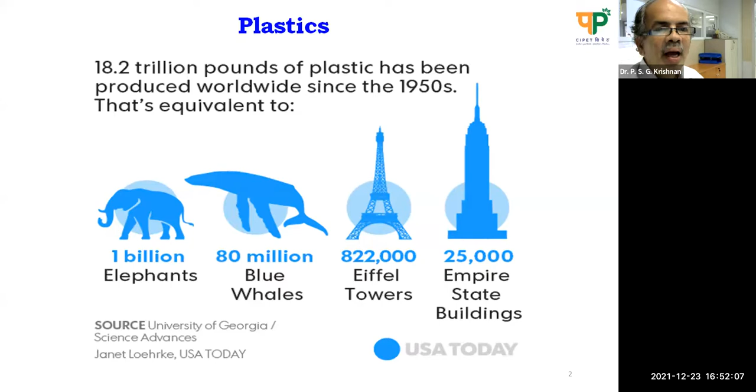And if you see the PET, it is lightweight in nature and it reduces emissions. That's why it has replaced the bottles as well as the metal containers. It gives a low carbon footprint, it uses less water in production, and it costs 50% less when compared to the other alternatives. India has one of the highest PET recycling rates globally: 90% of PET bottles produced so far are recycled.

PET is safe. Unlike polycarbonate, there are no BPA issues, bisphenol A issues, and it is free from heavy metals. Over 70 lakh people are directly or indirectly associated with the PET industry, and they are also supporting the circular economy. More than 100 crore garments and home textiles are made from recycled PET bottles.

Earlier, I was working in Futura Polyesters. At that time, they used to collect the waste PET bottles and do chemical recycling. Then that chemically recycled PET was exported to the USA, to Pepsi, for making PET bottles again.

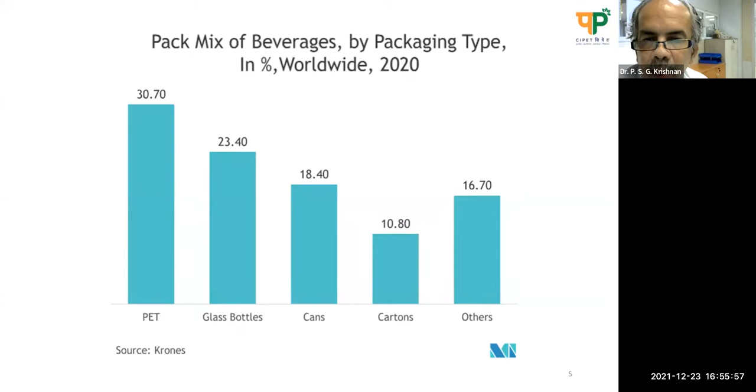Let us see the per capita usage. North America has 15 kgs as far as PET is concerned, and we are on the lower side, hardly 150 grams. We have low per capita usage because we always take fresh fruits as well as freshly brewed coffee. Also, we prefer to take water in bigger cans rather than in water bottles. That is why we are on the lower side. In the global market, the highest growth rate is expected in the African continent as well as the Asian continent and Australia.

And there will be a medium level in the case of both North and South America. And in the case of Western Europe, it will be on the lower side. And then the IMARC Group expects the market will reach 15.2 million tons by 2026, compared to 13.1 million tons in 2020. So such a huge growth rate is possible, and it has very good future prospects.

And if you see, the average life expectancy today is 69 years, whereas a bottle can remain as such for 450 years. Therefore, if you leave the bottle, it creates a lot of problems for the environment. Therefore, it should be properly recycled instead of leaving it to the landfills. This is the time frame for different materials, and the bottle takes 450 years.

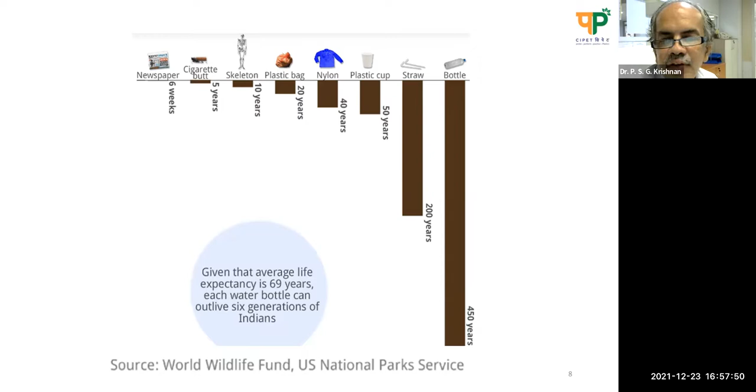And if you see, in India, among the most common types of plastic consumed, the first is polyethylene, followed by polypropylene, then comes PVC, and PET at 1,275 kilotons. This is a report given by the Plastindia Foundation. This is the Indian scenario as far as PET consumption per year.

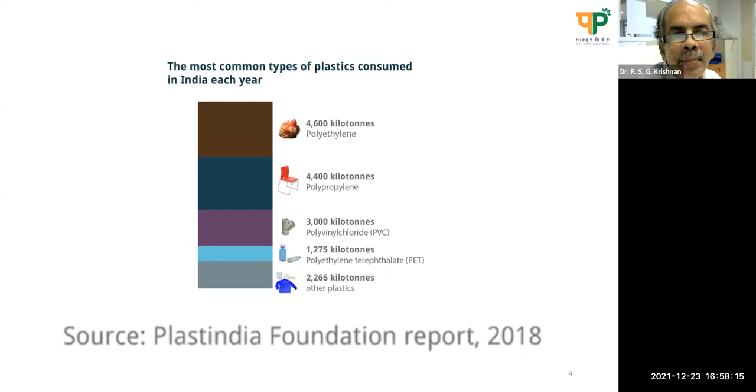And if you see, PET bottles are among the plastic items found along the Indian coastline. This was the report given by Beach and Beyond. Around 6,511 plastic bottles are lying along the coastline. Therefore, even though we think that 90% is a very good amount and we are above the average of PET recycling, still that 10% either remains in the landfills or on the roadsides and remains unutilized. Therefore, we should make use of that by recycling it and make it 100%.

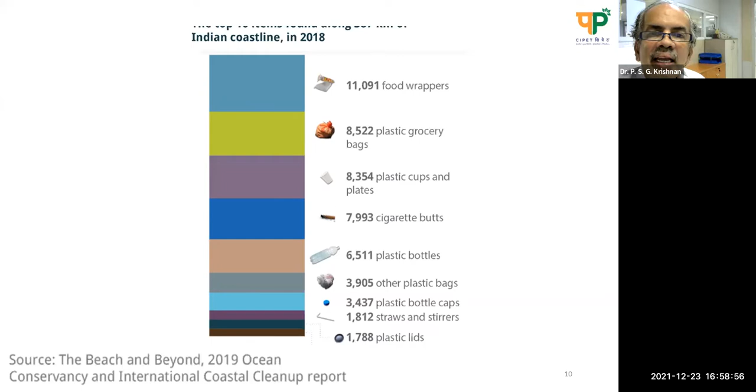Therefore, if you see, the waste generated by 2050 will touch 25,000 million metric tons. And waste recycling will hardly be 8 billion metric tons, or 8,000 million metric tons. Therefore, there is still a big gap between the waste generated and what is recycled. By 2050, roughly 12 billion tons of plastic waste will end up in landfills, and that creates a lot of harm to the natural environment. Therefore, we should always encourage recycling so that you can minimize the plastic waste instead of it going to the landfill.

And if you see, the overall plastic waste recycled is around 60%, PET recycling is 90%, whereas the world average is only 22%. We are on the better side, but there is still a long way to go. And we search for solutions because a huge amount of waste is lying around, and this is not a new scenario. You might have seen such scenarios in many parts of our country. And what do you mean by recycling? Recycling saves energy, preserves natural resources, reduces greenhouse gas emissions, and keeps toxins from leaking out of the landfills. That is why we recycle.

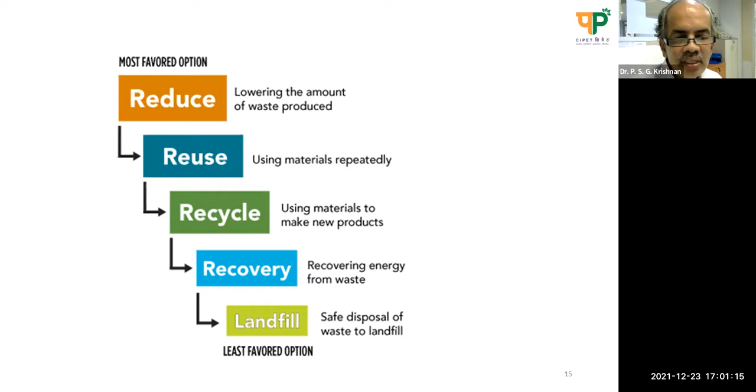And if you see, in the 1980s there was no recycling concept and everything was going to the landfill. They used to dump it as landfill. So what happened in New York? There was a land scarcity. Therefore, since there was land scarcity in New York, they immediately took all 3,000 tons of plastic waste, put it on the Mobro garbage barge, and tried to send it to a neighboring state. The ship traveled here and there for 155 days looking for a place to dump these 3,000 tons. First, it was sent to North Carolina.

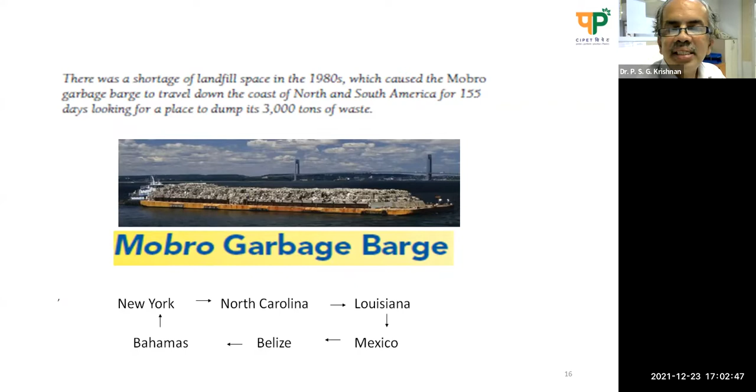Only then did the concept of recycling come. Till then, it was just going to landfill only. Thank goodness that they refused to allow it in. Otherwise, we would still be confined to landfill only. Afterwards, the recycling concept came into existence. And if you see, today we are giving different numbers.

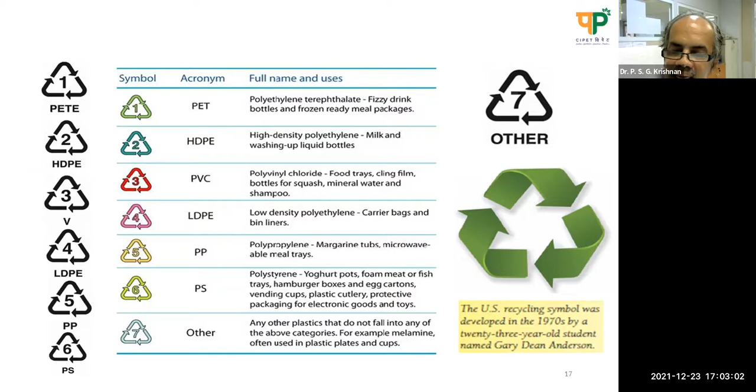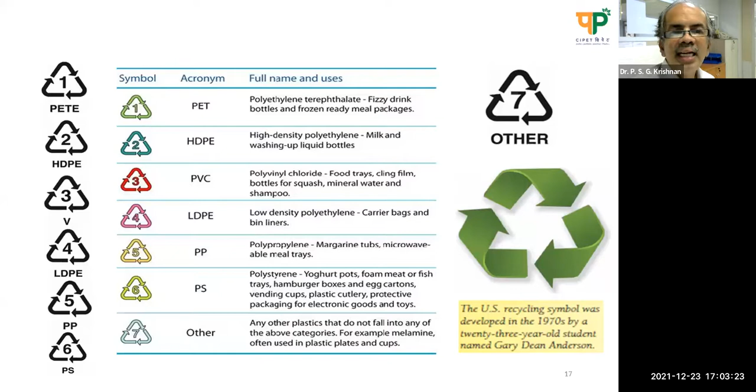This is the recycling symbol, and this was developed by a student. He's a very young chap, 23 years. Gary Anderson created this recycling symbol in the 70s, and that is being used today. And different numbers are given. PET is given 1, HDPE 2, PVC 3, like that, and none of these 6 is given as 7. If you see any recycling symbol with a number, that tells what kind of polymer it is.

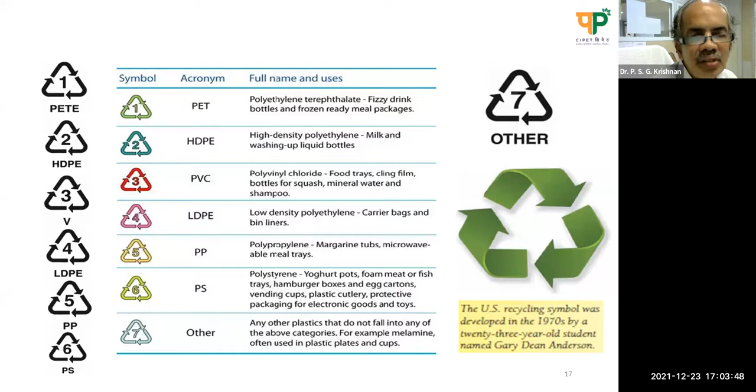Luckily, throughout the world, the same number is used. Whether a bottle having a number 1 is from India or from Australia or from America, it means it's only PET. There is no confusion. Everybody is luckily following the same number, so that any layman, if he takes it, by seeing the number will be able to easily sort it out. That is why this number came.

And if you see the classifications of recycling, there are 4 types. Primary recycling is nothing but the recycling that you do on the shop floor. When a material is not meeting the specifications and gets rejected, they do the recycling. It is straightforward recycling. There is no confusion, no need to do any segregation and no need for any cleaning. This is straightforward and is being used in all the industries. If any material gets rejected, typically they use around 10% and consume it.

Secondary recycling is the one which comes after it reaches the customer. Secondary recycling generally will be mechanical recycling. Here a lot of things you have to do. You have to do the cleaning and then segregation, and then you go for the mechanical recycling. Tertiary recycling is chemical recycling. In today's talk, I will be talking about mechanical as well as chemical.

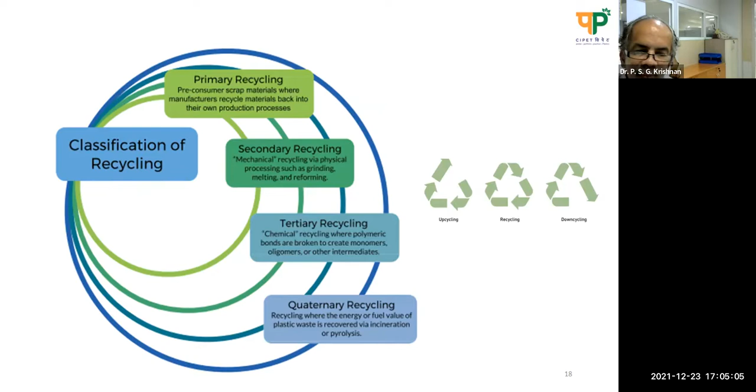The fourth one is quaternary recycling, where you get the energy or fuel value of the plastic waste, either by incineration or pyrolysis. As far as PET is concerned, quaternary recycling is not the right option. This is what I was telling, that the granules are produced and then you make different kinds of plastic articles. Then if it gets rejected, not meeting the specifications, you try to consume it rather than throwing it out. That is known as primary recycling.

If it goes to the consumer, then afterwards, if it goes to waste, either you can go for mechanical secondary recycling or go for tertiary recycling, make a monomer, and this monomer you can again polymerize. Otherwise, if all these things are not possible, then you send it for quaternary recycling.

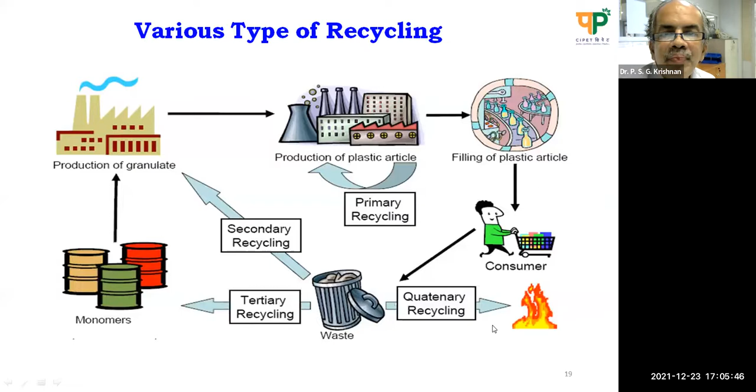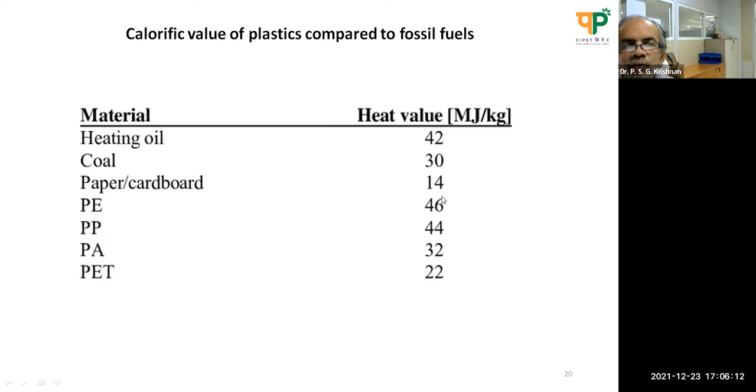As far as PET is concerned, the calorific value of PET is very much on the lower side. It is 22 only, whereas coal is 30 and heating oil is 42. That is why PET is not the right material for quaternary recycling, because it's half of heating oil or coal. Whereas polyolefins, PE and PP, are 46 and 44; that is why polyolefins are the most suitable for replacing coal or heating oil, whereas PET is not suitable. Therefore, I will be confining to secondary and tertiary, especially mechanical as well as chemical recycling.

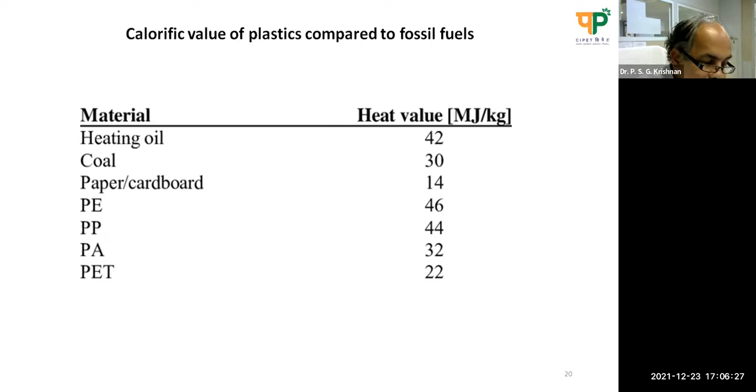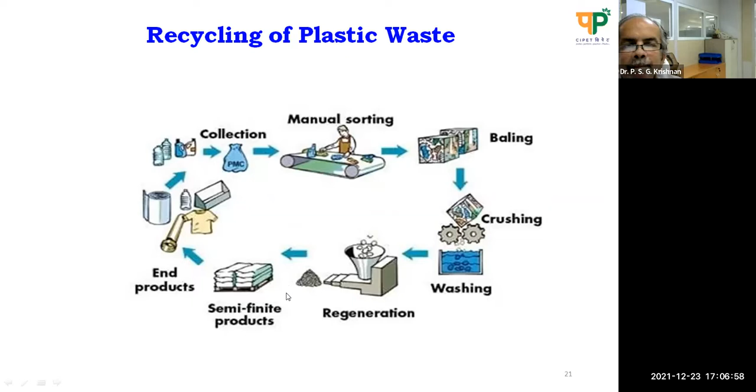And then a lot of separators are used, because sometimes you may have some metal contaminations. In that case, you have to go for magnetic separators, and sometimes you may have non-ferrous contaminations. In that case, they use an eddy current separator.

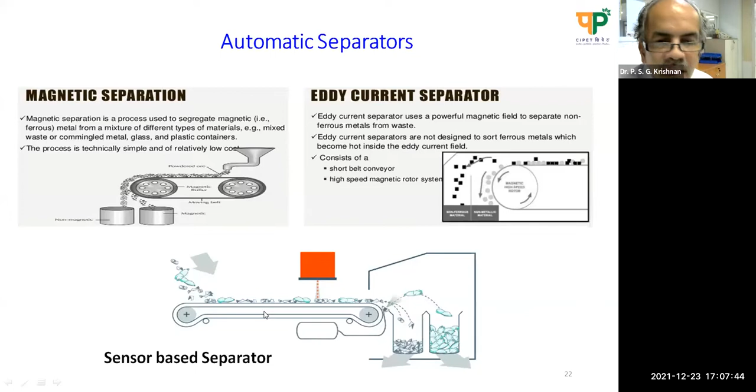Go for sensor-based separators if you are having a lot of waste; based on the sensor, it differentiates different polymers. If the volume is less, go for manual sorting. That will be expensive, and it also contains errors. Whereas with the sensor-based one, you have to do a lot of capital investment, but it will be 100% free from errors. Sensor-based separators are not suitable when the volume of the waste is very much on the lower side.

Before going into PET, let us know that for the common man, PET is only a bottle. But if you see the bottle, it contains 3 polymers. The body consists of PET, generally PP will be the closure, and typically the label will be PVC. Therefore, when you crush it, you have to see that the PP closure is removed, and the PVC label also should be removed.

Now, the recent thinking is why have all 3 polymers, which gives a lot of problems when you go for recycling. Therefore, they want a single polymer, whether it is the body, the label or the closure. If everything is made up of PET, then it will be easy. No removal of PVC or PP is needed, and you can straight away go for recycling it. But currently, since all 3 polymers are there, you have to remove them.

PP is easily removed, since it has a density lower than 1. When they wash it, it starts floating, and the PP is removed. The PVC labels are removed by means of air classifiers.

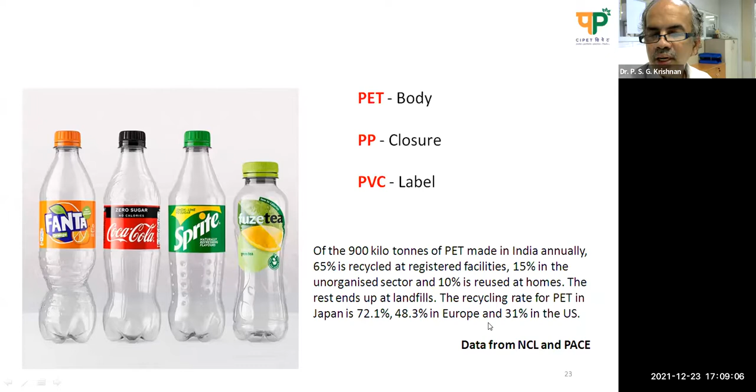If you see India, 90% is the recycling rate of PET, followed by Japan at 72%, Europe 48%, and 31% in the US. This is the PET recycling rate. And finally, when you do recycling, either you can make other polymers, or you can again make bottles, or you can go for making yarns or for strapping applications. 90% goes into any of these applications, and only 10% goes to landfill or still lies with somebody else.

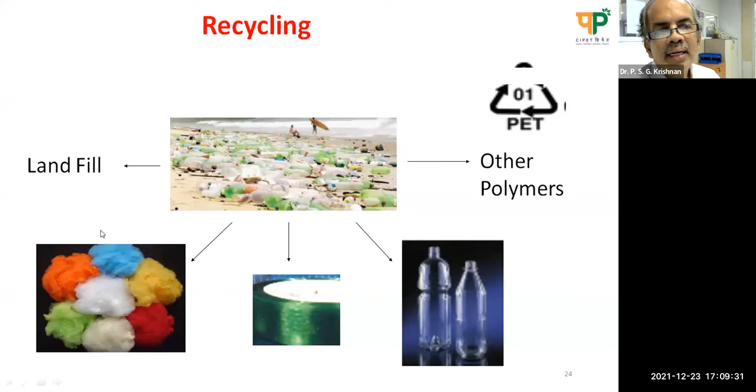Let us see mechanical recycling and chemical recycling. Mechanical recycling preserves the molecular structure. You melt it, and then again you make some product. During that process, the color deteriorates, and the strength also deteriorates. Finally you have to go for downcycling applications. If you go for chemical recycling, it splits the polymer chain, and as a result you will get the raw materials. Once this raw material is there, again you can go for polymerization.

As far as food contact applications are concerned, chemical recycling is the best method compared to mechanical recycling. Why is it so? The PET bottle may sometimes be abused. They might have used it for filling some acids, some phenols, or some other purpose, or in some rural areas they may also put pesticides in it. In that case, if you do mechanical recycling, those toxic substances can get into food contact applications.

Whereas if you do chemical recycling, since you are doing depolymerization, those toxic chemicals can be easily removed, and then you can make the monomers again. That is why they were doing chemical recycling and making it again, sending it back to Pepsi for making soft drink bottles.

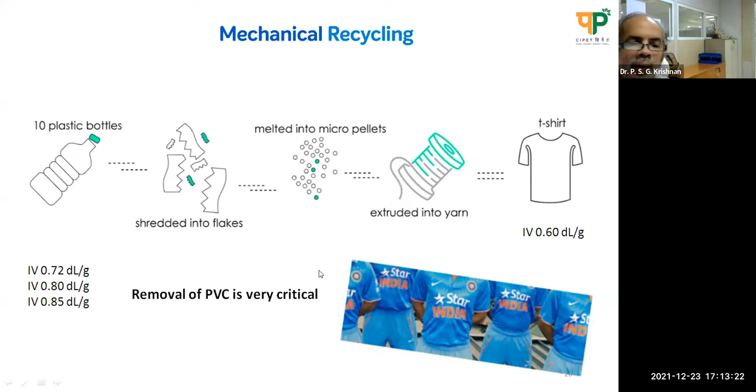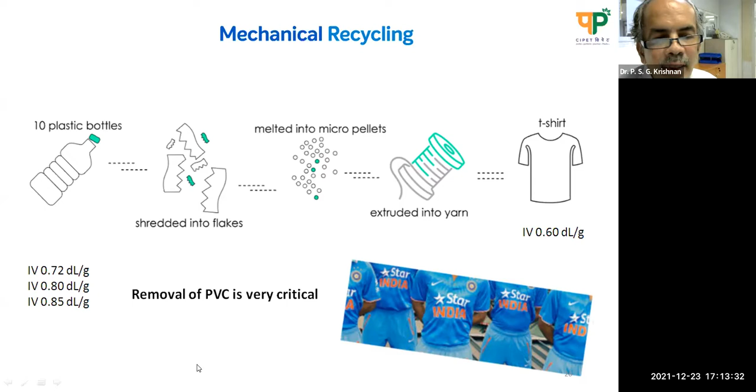Suppose you want to again go for making bottles by going for solid state polymerization; the PVC remains as black spots in the preforms, and when you blow the bottles, the bottles will burst in those places, because those are the weak places. Therefore, in recycling, unless you remove the PVC completely, you will get into a problem, either for the yarn applications or the bottle applications. That is why it is very, very critical. That is why now the thinking is that we will go for a single material rather than having PP, PVC and PET.

Before going to chemical recycling, we should know a little bit about PET production. Most of you might know this, but for continuity, PET is typically produced from purified terephthalic acid and ethylene glycol. Initially, they were manufacturing it from DMT. At that time, the technology for purification of terephthalic acid was not available; they were making only impure terephthalic acid. Therefore, they were making dimethyl terephthalate for making PET. Later, when the technology came for making purified terephthalic acid, all the industries moved from DMT to terephthalic acid.

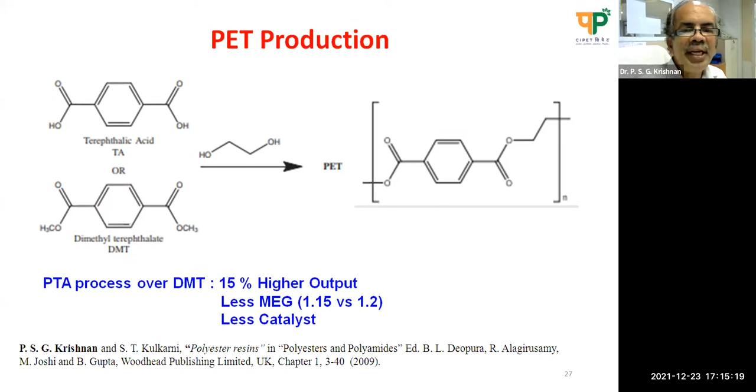The reason is that it gives higher output, because you don't have the byproduct methanol; instead it will be water. Also, the MEG requirement will be slightly lower, only 15% excess rather than 20%, and you need less catalyst. Whereas with DMT, you need fireproofing, otherwise the flammable byproduct methanol will create a problem in the industries. That's why everybody migrated to PTA technology, and today 99% of the industries use only PTA for making PET.

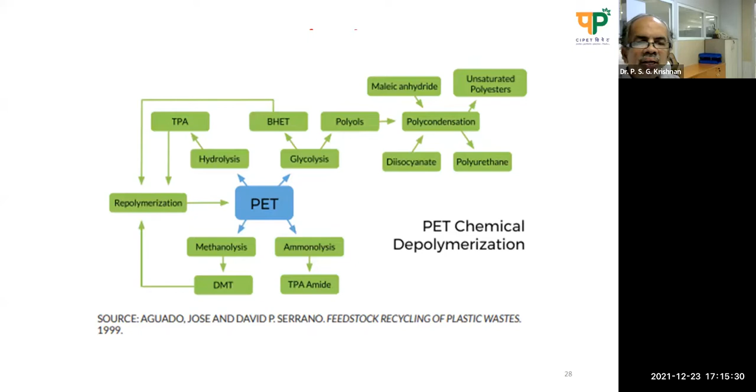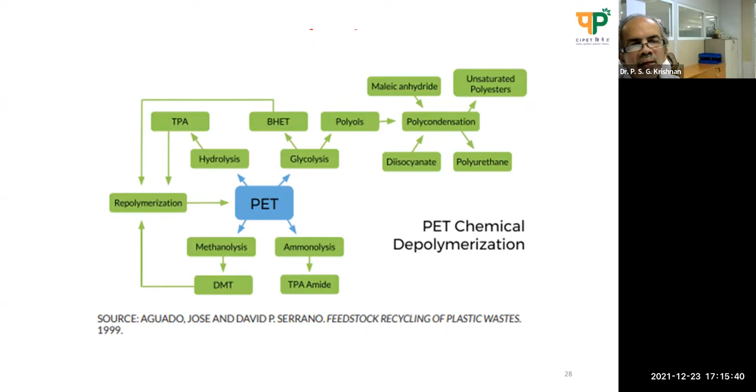Let us go to chemical recycling. PET can undergo hydrolysis, glycolysis, methanolysis, or ammonolysis, and you can also make other polymers, polyurethanes or unsaturated polyesters. When PET undergoes hydrolysis in the presence of sulfuric acid, you get terephthalic acid. When you use sodium hydroxide as a catalyst, you get the sodium salt and finally treat it with sulfuric acid to make terephthalic acid. This is the hydrolysis process, which brings PET back to the earlier materials, especially terephthalic acid.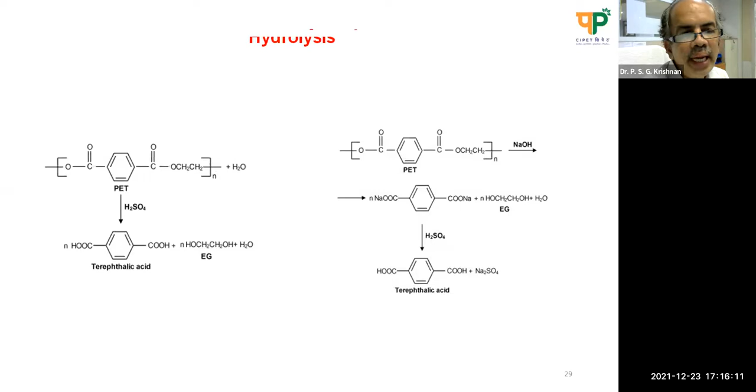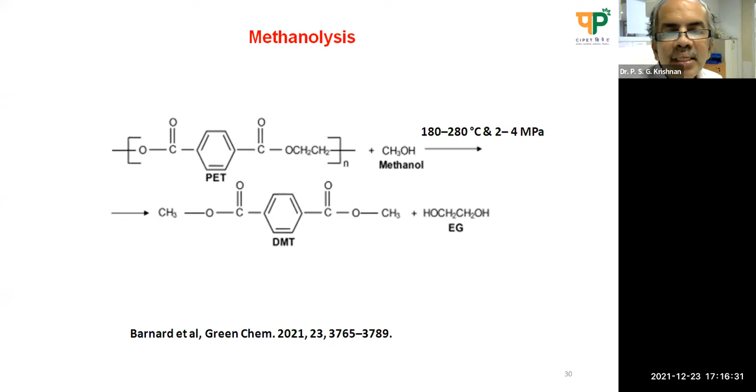The other one is methanolysis. You have to use a high pressure of around 3 megapascals at 180 to 280 degrees centigrade, and PET undergoes methanolysis to make DMT. Then this DMT becomes the starting material. In the case of hydrolysis, PTA becomes the starting material for making PET.

Let us go to glycolysis. This is what Futura was doing, using ethylene glycol for glycolysis. As a result, you get the BHET dimer, then BHET. Then again you do the polymerization. So from the PET waste, you depolymerize it, followed by polymerization.

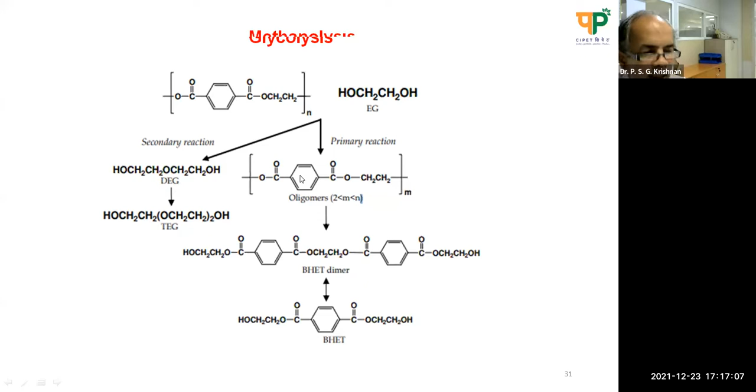You will get the chemical recycle, that is glycol. Using the glycolysis, you are able to make it one. This is what they were doing, the Futura.

Another one is that from glycolysis, you can also make some polyols. Once you make polyols, these polyols can be treated with the isocyanate, especially the diisocyanate, MDI, so that you can make a polyurethane. And this polyurethane can be used as a coating for insulation applications. Huntsman is doing it.

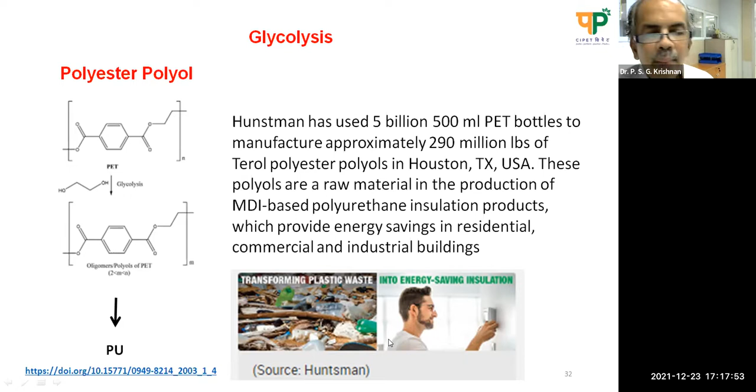They are making the polyester polyols. And later on, this polyester polyol is used for different kinds of energy saving applications. Therefore, instead of making the original one, they were making the polyols, and these polyols are used for making MDI based polyurethanes. Then another one, from these polyols, if you treat with maleic anhydride, you can make unsaturated polyester resins. This is one way of converting PET to polyester resins.

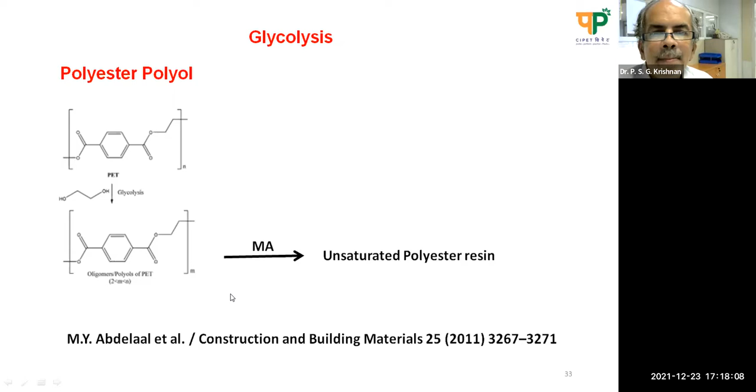Then another one: instead of using ethylene glycol and going either for polyols or for BHET, they were using butanediol. And once butanediol is used with PET bottles, you can make PBT. Currently SABIC is converting PET into PBT, and this PBT is widely accepted, widely welcomed in Japan.

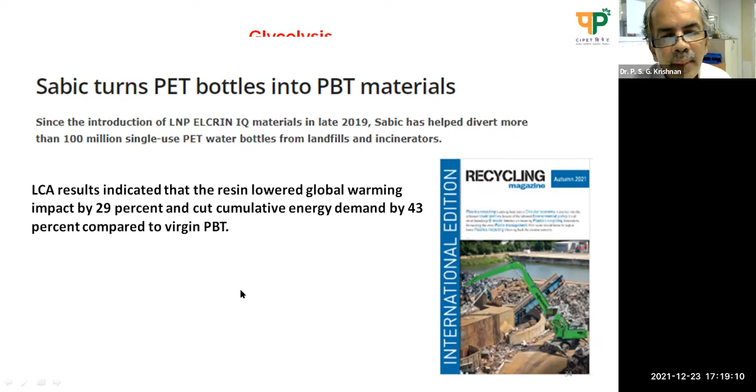And recent LCA studies also say that there is a reduction in global warming by 29%, and the cumulative energy demand is also reduced by 43% when compared to PBT, because PBT is widely used in automotive applications. Therefore, from PET bottles they were making PBT, and with this PBT there is a reduction in global warming as well as in energy demand. This is what SABIC is doing.

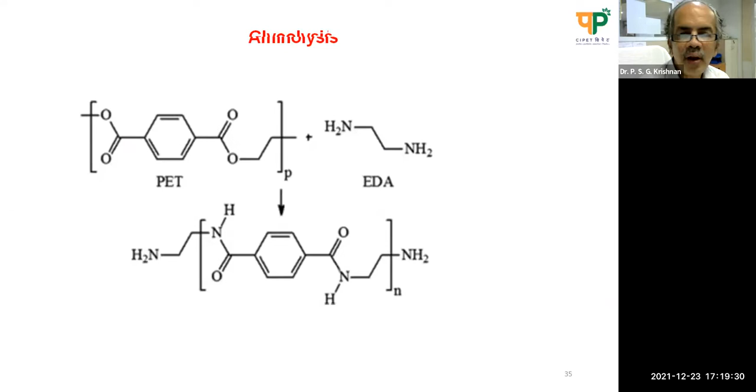And then you will have aminolysis, wherein the amine is used. They use ethylene diamine to make amide linkages, which you can introduce in the polymer. This is one way of doing it. Or go for ammonia, where you will make terephthalamides, and these you can use for making polyester amides.

Therefore, from PET, by means of chemical recycling, you can go back to PET, or if you don't want, you can use the PET to make PBT, or go for making polyurethanes, or make terephthalamides to make a polyester amide, or treat with maleic anhydride to make an unsaturated polyester. These are the various options available, especially for food contact applications.

If you want to again use PET for food contact applications, the best thing is to go for chemical recycling rather than mechanical recycling, because in mechanical recycling, any accidental toxic material present in the PET bottle will not be removed at all.

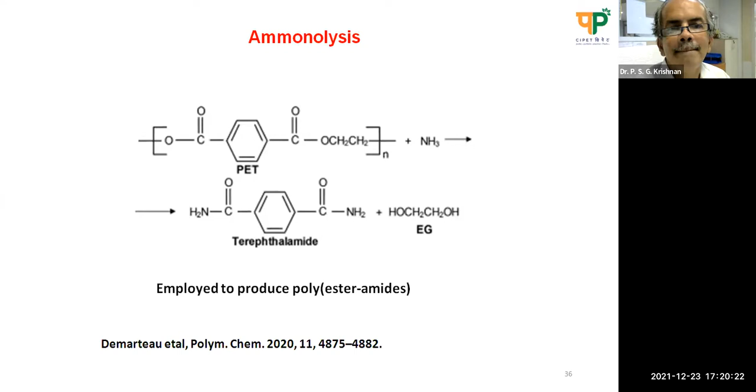This is the paper wherein they have shown that PET can also be used for 3D printing applications, because 3D printing is a new concept and everybody is interested to work on these things. And now PET can also be used for 3D printing.

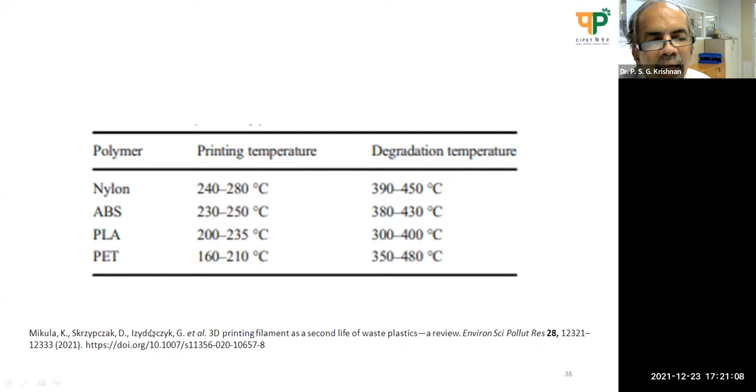And finally, I would like to conclude with the statement of Stephen: plastic is still a fantastic, wonderful material, but the end of life of plastic has not been thought through enough. We need to find solutions to continue to use plastics. And the usage of PET is going to increase in the coming decades.

We need more and more recycling, and more and more newer solutions so that this PET waste will not get into the land or go to landfill. Therefore, one should look for newer solutions so that you can make use of PET; plastic is a very, very wonderful material.